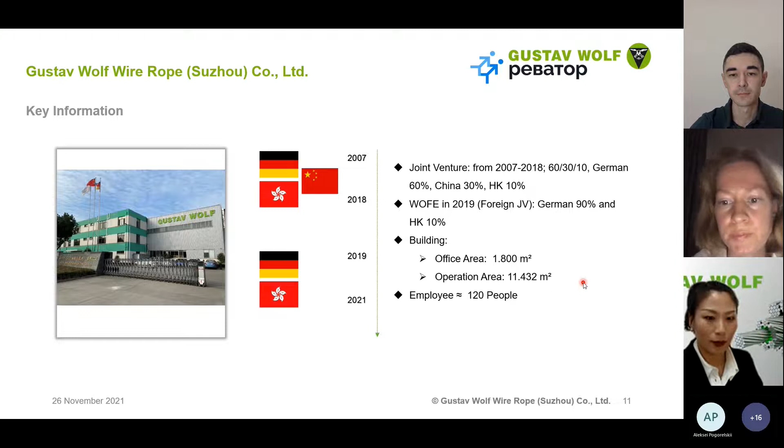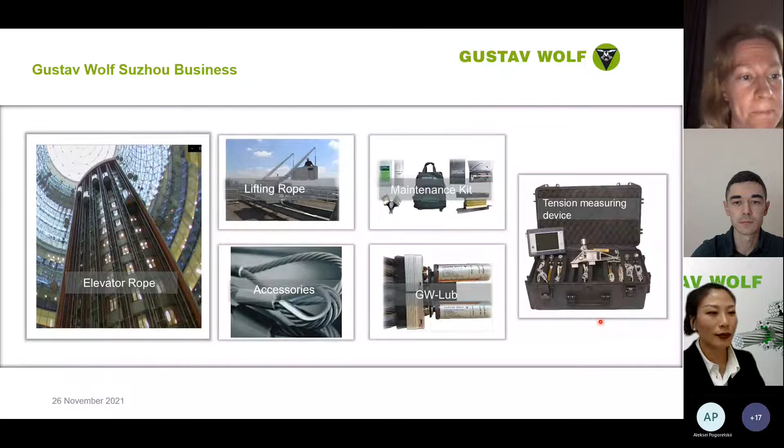The main product is elevator rope. Based on the rope core, there are three main types. The first type is fiber core ropes, usually for low-rise and low-speed elevators. The second type is mixed core, where the very center of the rope is still made of sisal but with reinforced inner strands together with the fiber core. These are recommended for mid-rise and mid-speed elevators. The third type is full steel core ropes, made entirely from steel, which gives the ropes a higher minimum breaking load. Full steel core ropes are for high-rise and high-speed elevators.

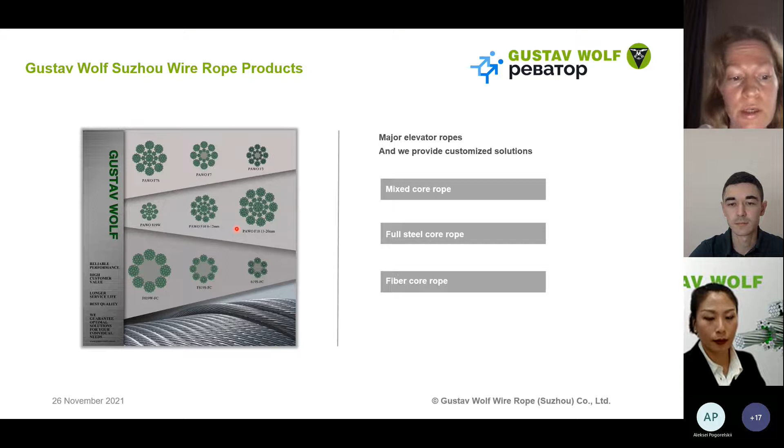So this is more detailed pictures on the rope construction types. You can have a clear picture that the rope core is fiber, and then these are the mixed core. Very center is sisal and inner strands, which are from steel, and also full steel core ropes.

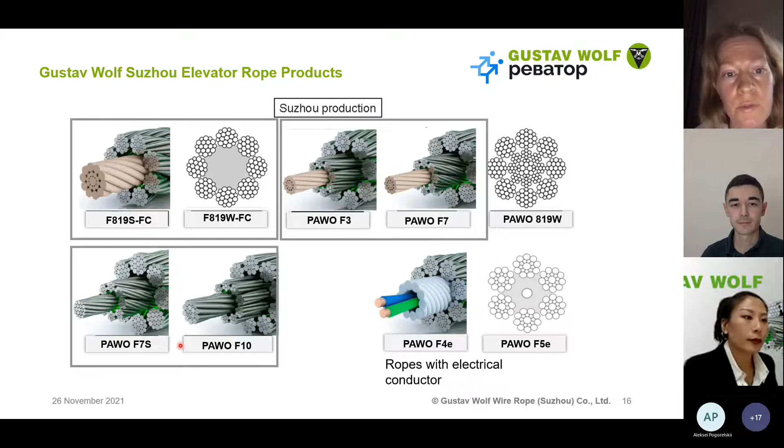So the whole process is controlled strictly and precisely by following the same global international standards and the local standards as well.

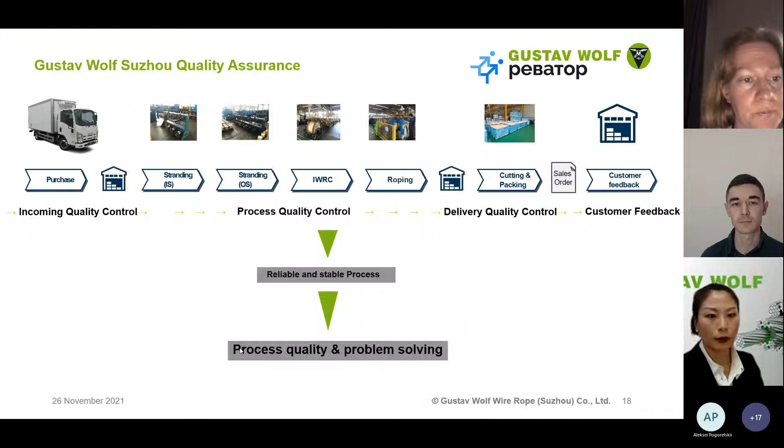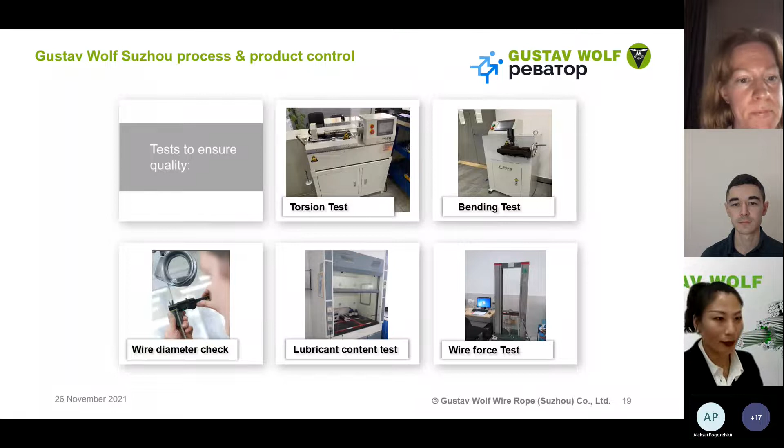Finished ropes are also tested with fatigue bending test and minimum breaking load testing.

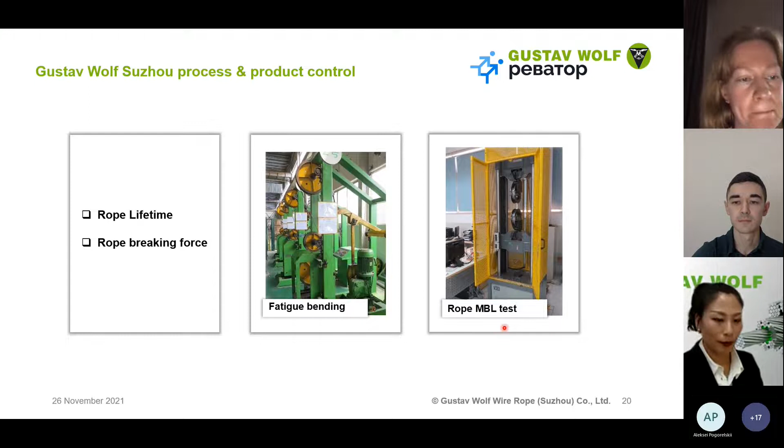So Gustav Wolf has established a comprehensive QA system, and we have been certified by the TÜV body, and as per the ISO 9001 and ISO 14001.

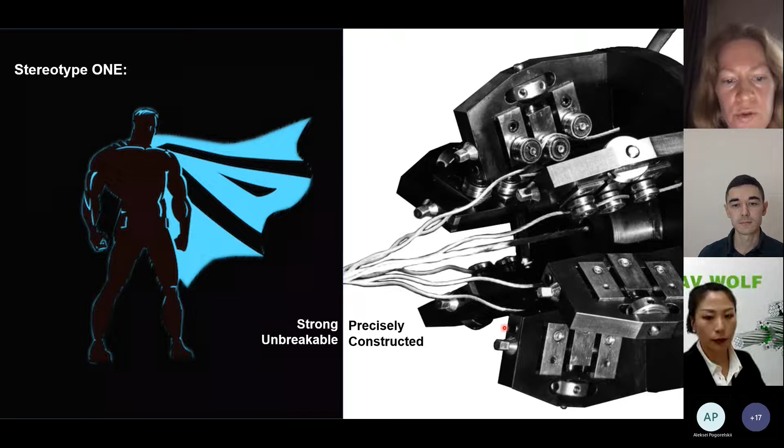Thank you, Anna. The next stereotype is if a wire is broken, then the rope manufacturer must be the one to blame. Fact is, a lot of reasons could cause so. For instance, if the groove is worn out, which caused wire breaks, or maintenance was not done properly, ropes can get rusty and ropes were replaced without the root cause being found, which means they were not changing the traction sheave. Then the replaced new ropes will be damaged soon as well. This for sure will cause the customer profit and future businesses loss.

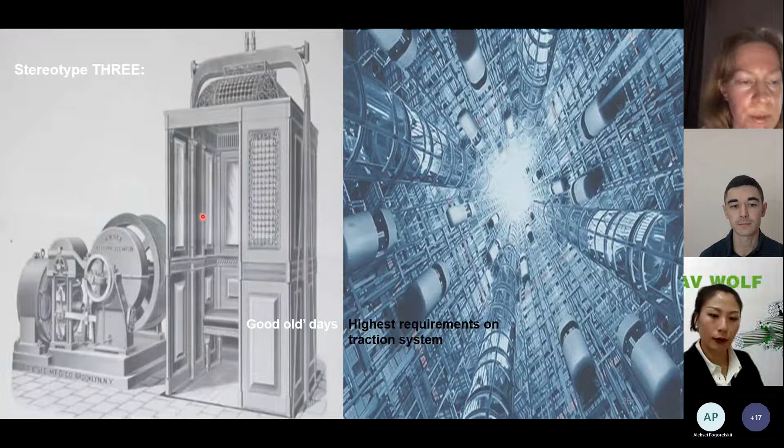Due to the above reasons, elevator ropes shall be taken care of. To understand how to take care of the ropes, we are starting with the typical damage types and the causes of these damages, followed by the maintenance solutions.

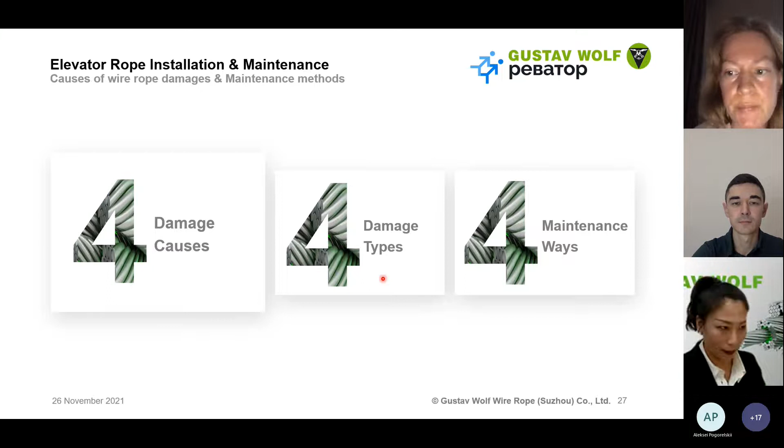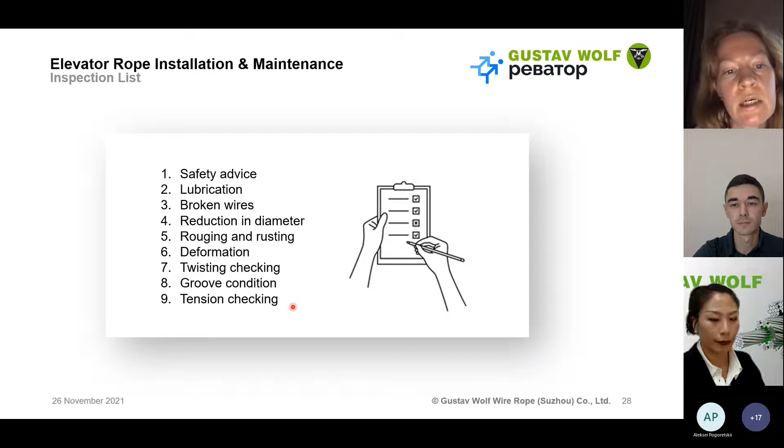Safety advice: always wear safety equipment, read the safety manual, and follow local safety requirements. And very important - follow the lock out and tag out procedure before doing anything.

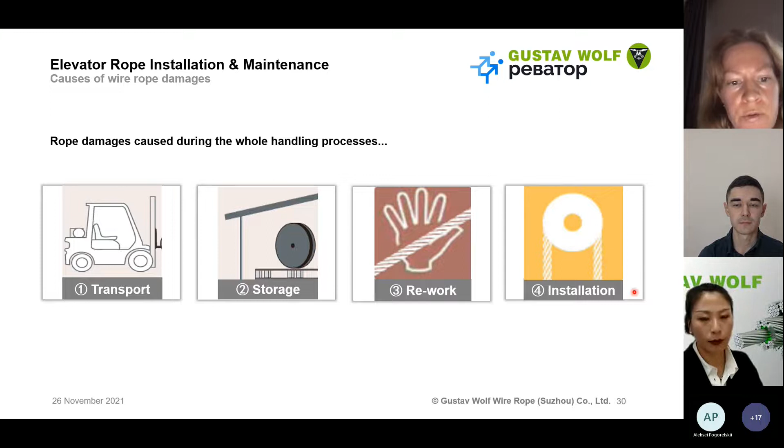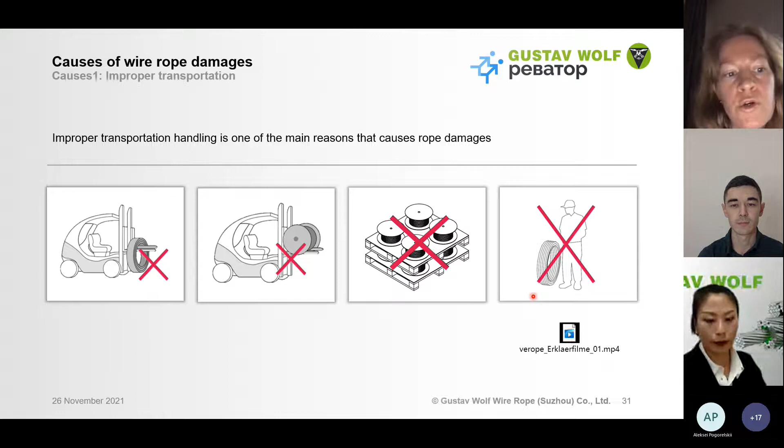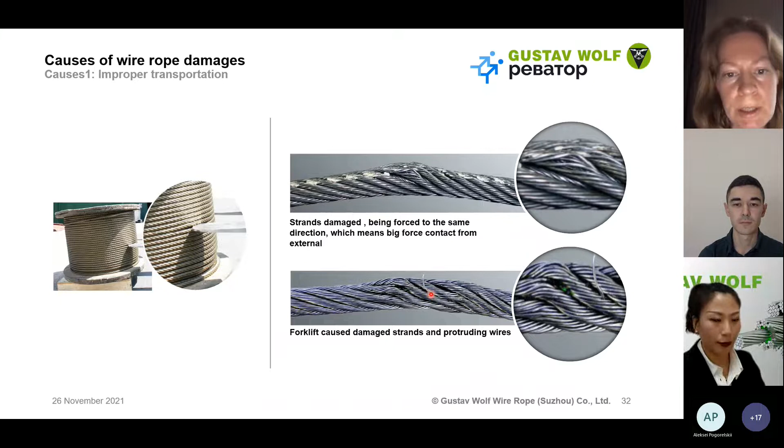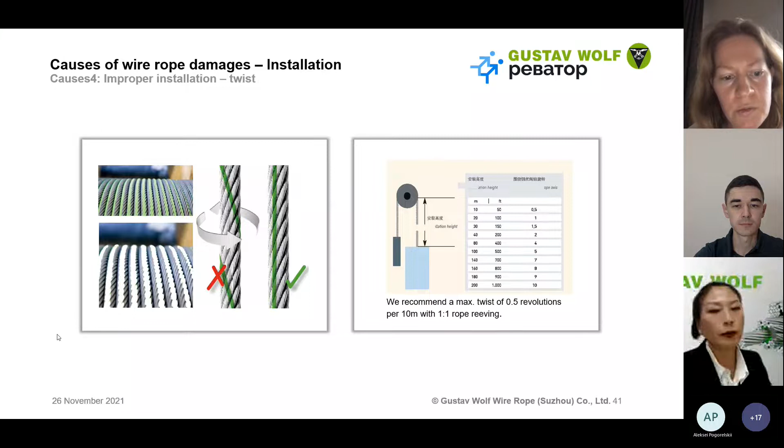Помимо вышеупомянутого правильного обращения с канатами, есть еще два очень важных момента, на которые необходимо обратить особое внимание в процессе установки. Одним из них является гарантия того, чтобы канаты не перекручивались. Поэтому у нас есть индикаторная линия разметки на поверхности канатов. И если веревки скручиваются, это тоже может привести к чрезмерному удлинению и вибрации системы.

The second one is to make sure that each rope bears the same load, which means the tension among all ropes should be balanced. So you can see here, this is not balanced - some is bearing more load, some is bearing less load. So the tension deviation that varies between ropes should be no more than 5%.

И вторым таким моментом является то, что нужно проверять, что каждая веревка несет одинаковую нагрузку. Это означает, что натяжение всех канатов должно быть сбалансировано. На слайде вы видите пример того, как натяжение происходит неравномерно, и это может приводить к проблемам. Допустимая разница в натяжении составляет 5%.

So what you see here was a case we had. There was a problem from the customer side. So when we went on site and measured the tension of their ropes, you can see the difference is very high. This will cause severe damage both on the ropes and the grooves.

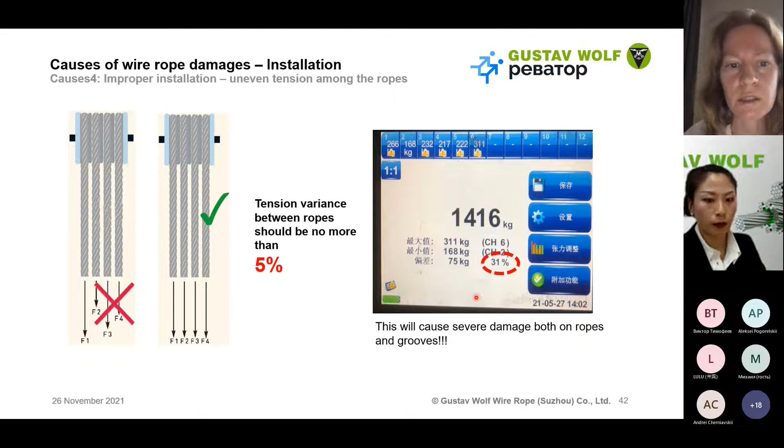И на картинке, на скриншоте справа вы видите пример проблемы от нашего клиента, который обратился к нам. И здесь видно, что при замере мы обнаружили, что разница в натяжении составляла 31% вместо допустимых 5%. Это очень много.

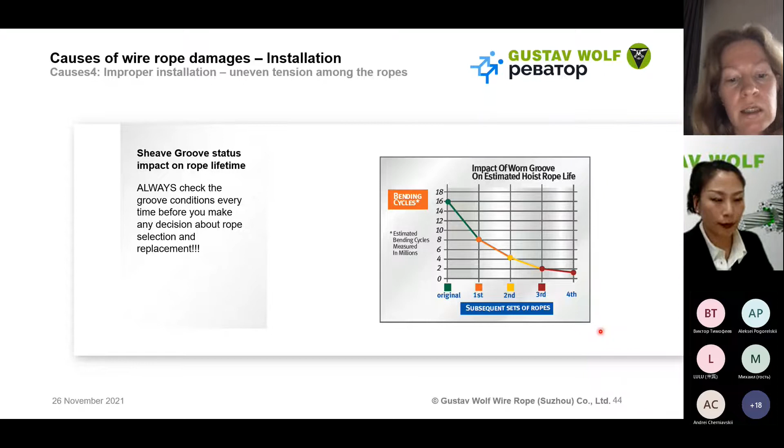In conclusion, there are four main rope damage causes. The first is improper transportation. The second is improper storage. The third is improper rework on the ropes. And the fourth is improper installation.

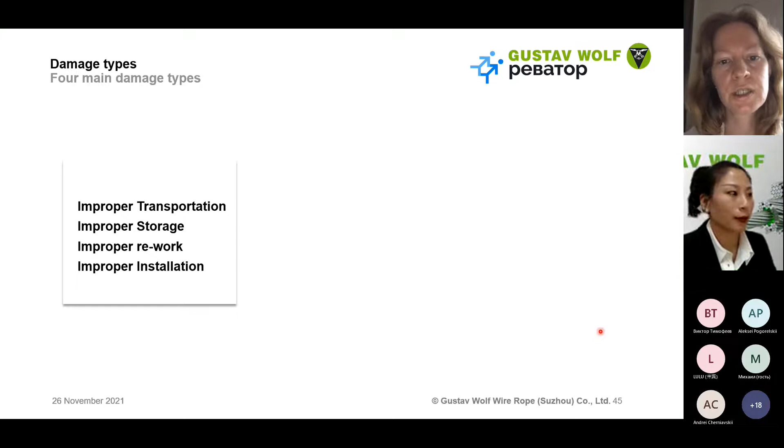We will then divide these damages into 4 different types, and for each type, we will come up with a maintenance approach.

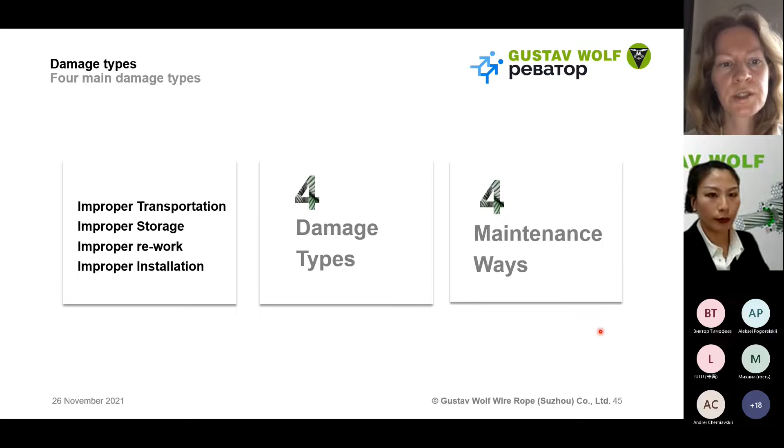This is the life of a rope: first they are subjected to external damage, then the second damage type is kinking and twisting. The third is corrosion, which causes rust. The fourth is uneven tension. These are the four main different damage types.

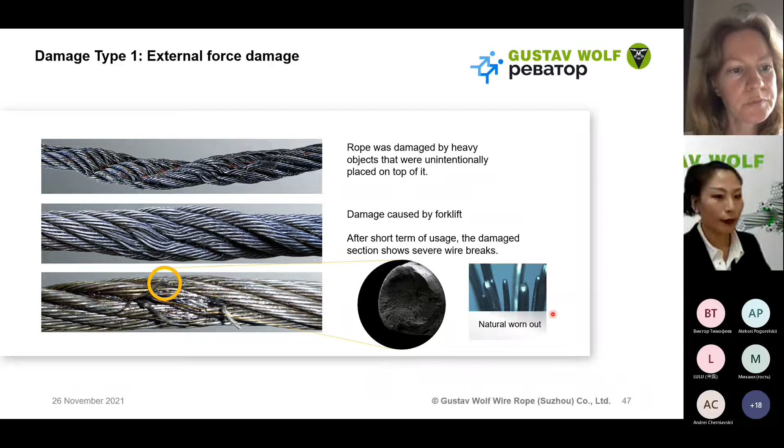More external force damage - this is a typical case. The ropes were dragged over a sharp edge here. The solution is always to make sure the ropes pass through a round or soft surface. Here also it's clear that ropes were dragged on a hard object on the ground.

The maintenance way of avoiding ropes being damaged by external force is to do regular transportation and storage training for on-site staff, so they know the importance of this, and rope cut-to-length service for each customer - that's why we have global partners for local customers. The third recommendation is to not unpack your coil or reel until the last minute before installation, so the ropes have less possibility of being exposed to conditions where they could be damaged by external force.

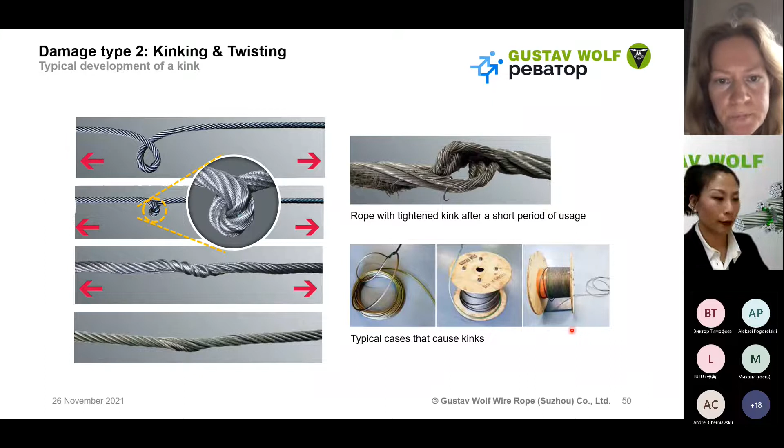The next possibility that can cause kinking and twisting is during installation, where the rope rolls past the flange of the deflection sheave and pulls into the base of the groove, and it can be twisted because it's not handled properly. This changes the rope lay length and rope geometry, which can cause the structure to change, and the strand turns into a shape like a bird cage deformation - that's why it looks like a bird cage, we call it a bird cage deformation. The solution is that you must use an anti-twisting device at the rope ends after it's fixed.

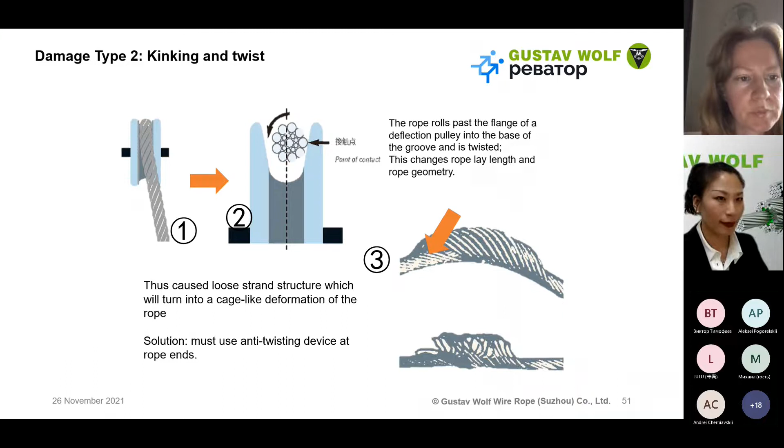The solution for sure is also regular transportation and storage training for on-site staff, and regular training on installation. This is the rope end fixing device which we provide - after the ropes are installed, the rope end is fixed with this device, so they don't twist.

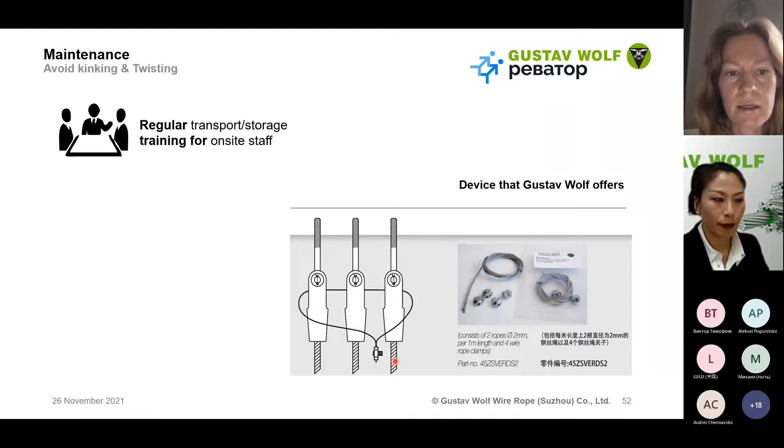This was damage type 2, so now comes damage type 3, which is corrosion. We have a reference here to rate the intensity of the corrosion, how to decide if it's too rusty or if you can still use the rope.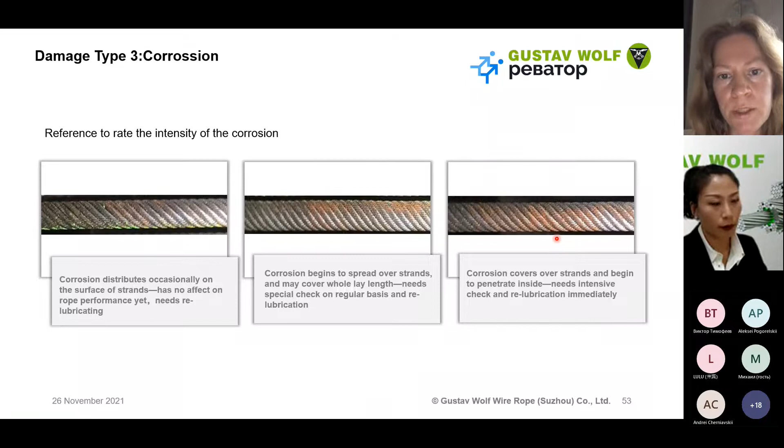The more situations of rusty and corrosion - this is a very serious case that usually occurs between the strands, which means it's too late for relubrication. In this case, the ground of the machine room will be covered by red dust. The next stage is that red dust will start trickling from the ropes, so you will see red dust everywhere. This is also because rust is already inside the ropes - significant fretting corrosion between the strands and even between the strands and the steel core. This means all of these cases are too late to do relubricating. The ropes should be replaced immediately.

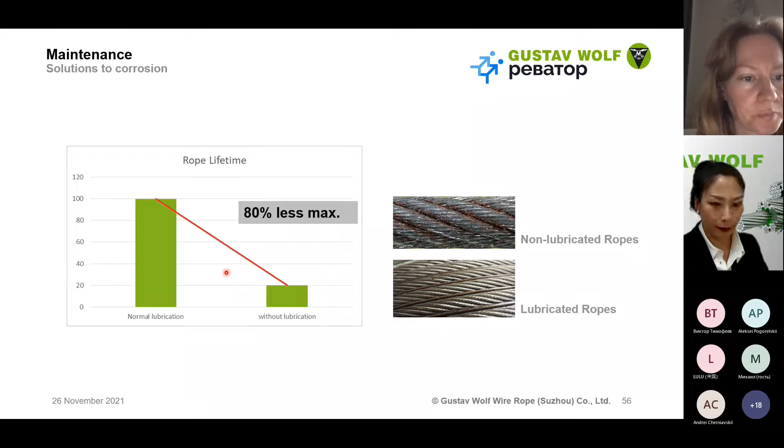You may have noticed that within our production process, one process is lubricating. During our production, lubricants are put into the strands, into the ropes. So why do we still need to do field lubricating? Because the lubricants in the rope are not enough for the entire rope lifetime to last, and the regular intervals of relubrication depend on the operating conditions, particularly in the region of the bending zone, where the ropes are continuously being bent, which means there are always frictions, a lot of friction between wires and even between the ropes and the sheave.

That's why they need to be lubricated, and also we need to do external cleaning before the ropes are lubricated. Why we need to do this, as we're seeing, is that the rope lifetime will be reduced if the ropes are not being lubricated. So for sure it's to protect the rope core and to reduce the wear between the ropes and the traction sheave, also to prevent corrosion. If there's no lubricant, the ropes will go rusty. And if the ropes are being lubricated, there's less friction between the wires and between the ropes and the traction sheave.

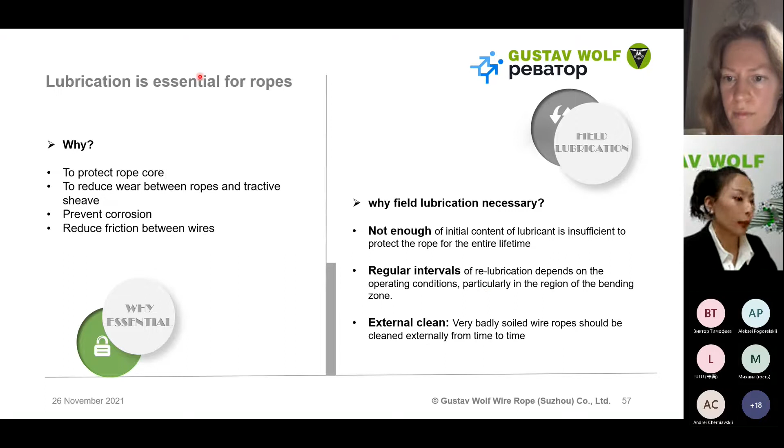So when do we decide to lubricate? To do lubricating is easy - take a glove or a cloth and apply this cloth on the rope. After you apply this on the rope, if you see there's no oily film on the cloth, this then requires immediate lubrication. If there's still a light oily film on the cloth, the condition is still good and no need to do immediate lubrication.

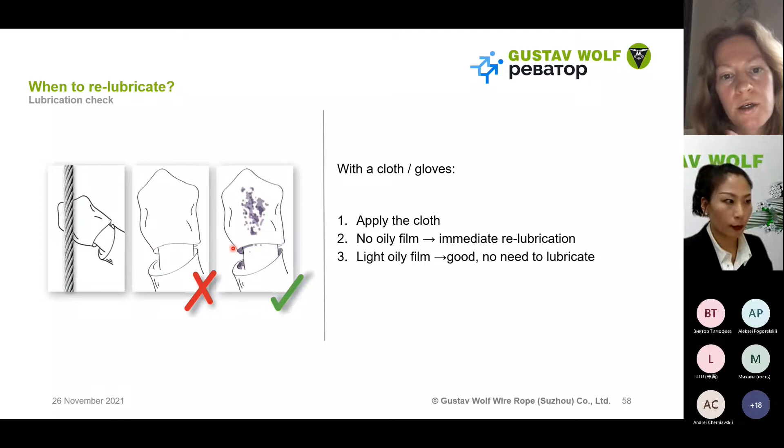There's another way to decide - a visual check. What you can see here is clear roughing between the strands, which means it comes from inside. So it's too late to do lubricating already. This is rusty and also covers all the strands, too late to lubricate. Another way of deciding is by the elevator's running trips. We recommend after 250,000 cycle trips to do lubrication.

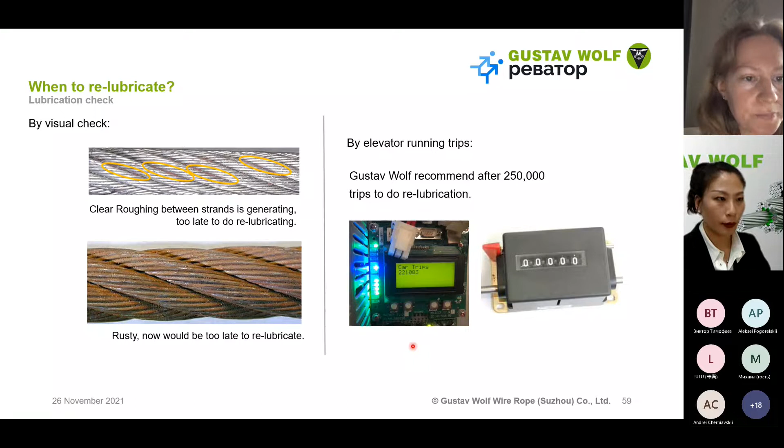The solution to solve this corrosion problem is that we offer two ways to do lubricating. The first way is manual. We have our lubricant called T86, offered in 1 liter or 5 liter packages. The manual way uses a tray where you pour the lubricant, with 2 rollers or brushes. Set the elevator on maintenance mode, apply lubricant to the rollers or brushes, then apply them to the ropes during maintenance running mode. After 2 hours, let the lubricant penetrate inside the ropes so they can absorb it. This is a specially designed lubricant which is easy to penetrate inside the ropes.

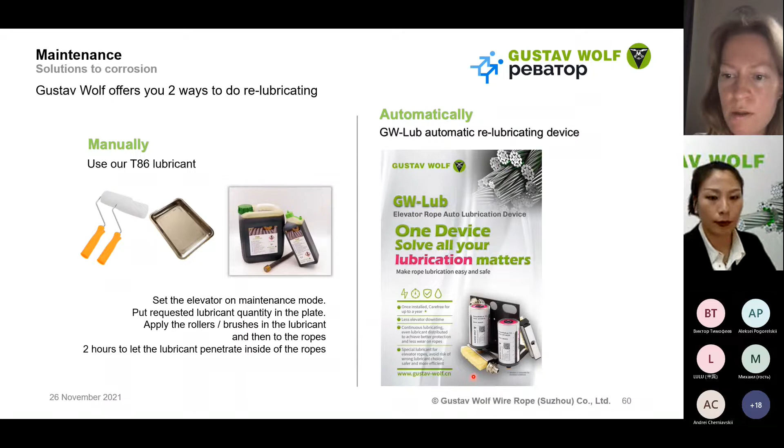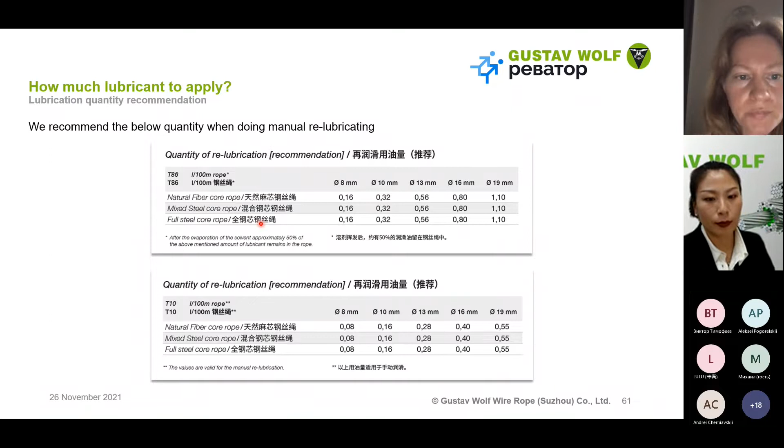With manual lubricating, sometimes it could happen that too much lubricant is applied to the ropes - the ropes are over-lubricated. What is the sign of over-lubrication? Lubricant dripping from the rope, or spread to other parts of the elevator, or a large quantity of lubricant on the bottom of the elevator shaft. Also the lubricant running down in drops from the traction sheave of the ropes. This is over-lubrication, which can lead to slippage of the ropes on the traction sheave - too much lubricant means not enough friction between the ropes and traction sheave, which means the traction power is gone.

Our solution is this powder, called Florida - a degreasing powder which you can apply with 2 brushes. You put the powder between the brushes, then let the ropes run through these 2 brushes to remove the excessive lubricant and absorb it.

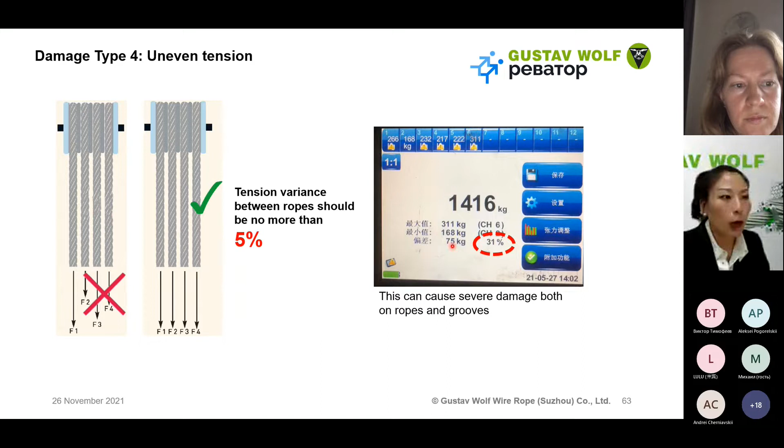This was damage type 3, which is corrosion, and the solution. So comes to the 4th damage type, which is uneven tension. As already mentioned, the biggest accepted variance is 5%, and this again caused severe damage both on the ropes and the grooves.

So what is our solution? As this is also a common case that when they were installed, the tension is not balanced, the solution is that we have a tension measuring device, which Revator also has. You can have a clear app display on this evaluation unit, and with this device you can compare to the traditional device where you need to measure each rope one by one. With this device you can measure up to 12 ropes at the same time. So it doesn't matter if you have a system of 4 ropes, 5 ropes, or 12 ropes, you can measure them all at the same time and get the data immediately on this evaluation unit, which automatically calculates the tension variance between the ropes. So you know which ropes are bearing more load, which are bearing less, and how to adjust. This is more stable and precise compared to manually measuring each rope one at a time. This can for sure make your work more efficient.

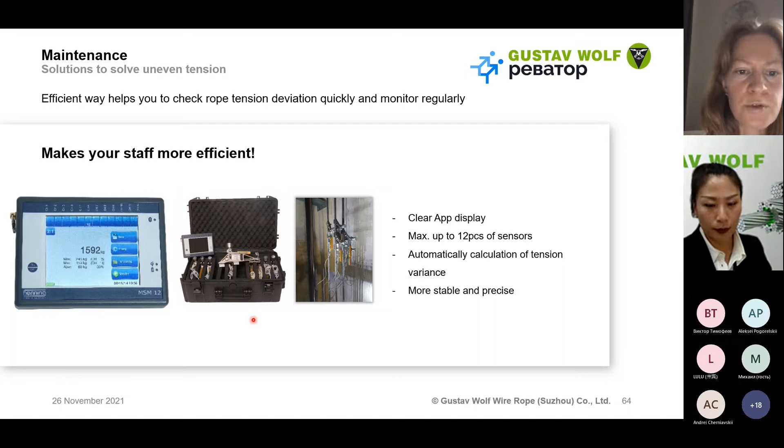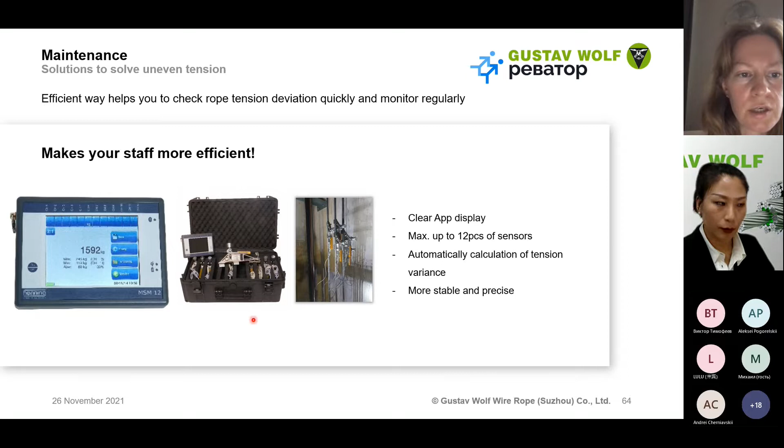Thank you, Anna. So this was my part about the points which need extra attention during rope installation and maintenance. So now comes our last part, which is the support that our partner Revator can offer you in the Russian market. I will pass this part to Mr. Anatoly.

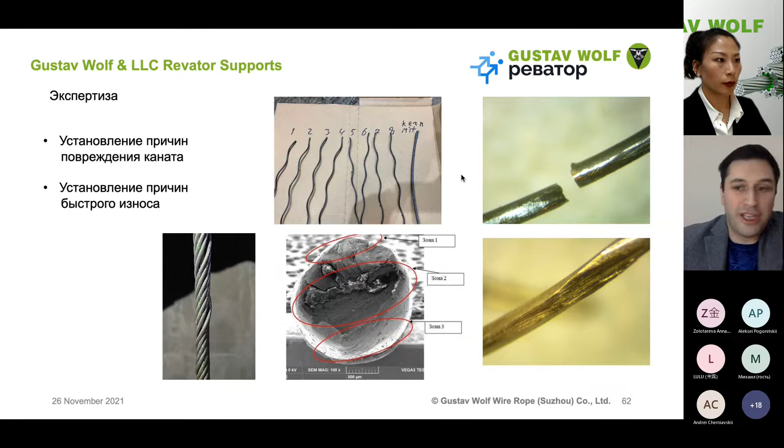Thank you, Mr. Anatoly.